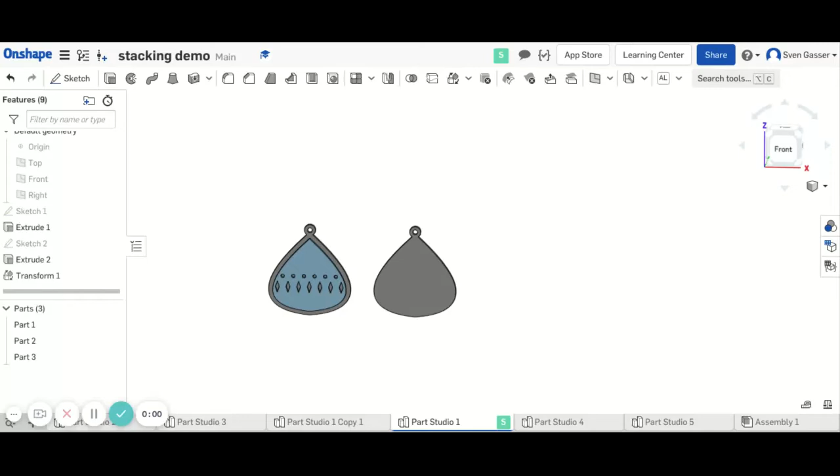Hello students, we are looking at how to make a repeating pattern like this. We're going to call it a linear pattern because it's in a line. So linear pattern is what we're going to look at here today to work on our ornament design.

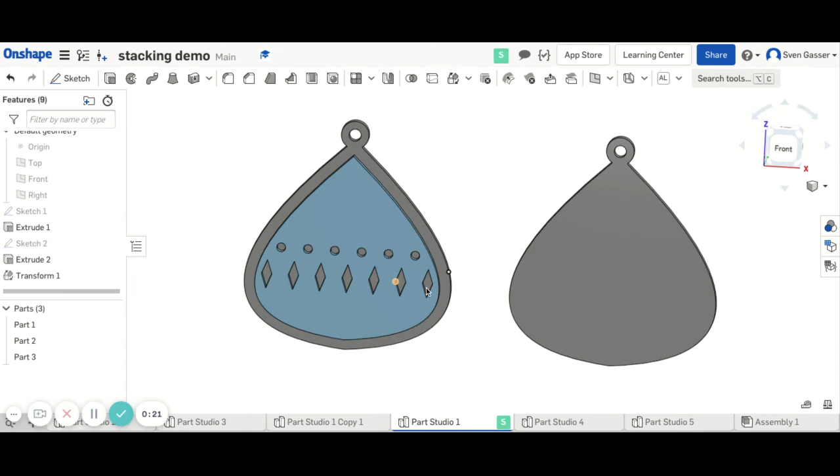This is assuming you already have a nice back piece to start your drawing on. We are going to try and make something similar to this one over on this second one here. Let's see if I can zoom in over there a little bit.

So we're going to start a new sketch, and we're going to say sketch on this surface right there. And then the first thing we're going to do is try to get this line that's a little bit smaller, but the same exact shape.

So we're going to find this tool called offset, and this creates a parallel line that is a certain distance away. If I click on that, you can see that it's going to make you go outwards if you want it to be larger. I kind of want mine to be smaller, going inwards like so. You can play with this little arrow. Sometimes if you get too small, it gives you an error message, so play around with that and see what works for you.

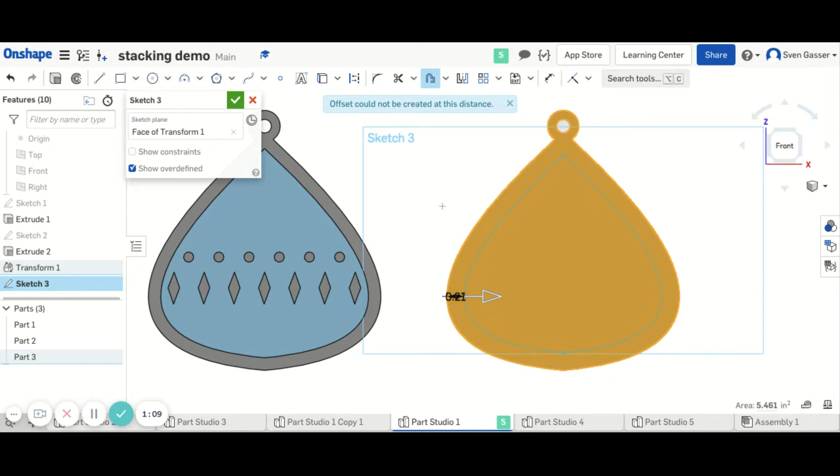That looks good to me. There we go. And you can always come back and adjust this number later if you want by typing something else in there.

So let's go ahead and put a nice shape in there. I'm going to do a little circle like so, and I want this one to repeat. This circle is going to be like this one here, and this can be any shape. It does not have to be a circle. It could be a little Santa Claus face or a candle or whatever you want, reindeer.

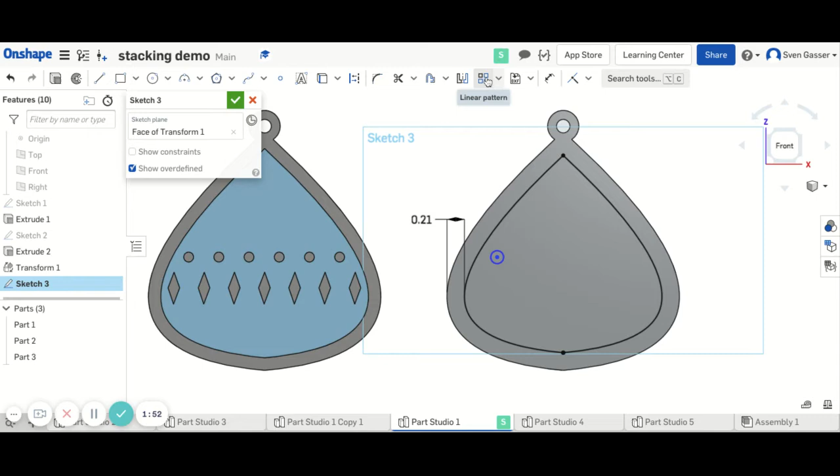So we're going to find this one that's called linear pattern. You click on that, and then we click on the part we want to repeat, and you'll see it starts showing us this here, right? So you can play with these arrows, and you can play with the distance between them.

I actually want maybe 6 or 7 or whatever number I want. Well, let's try 8, and those are pretty far apart. You can play around with these and get them to look pretty good there. Oh, I like the look of that. That looks pretty good, I think. Maybe a tiny bit less.

If you want to be really precise with this and make it exact, you might want to only pattern the left side and then reflect this over to the right side so that it's exactly the same. This one up here is if you want to pattern it vertically and make that repeat upwards at the same time. You can see that's not really what I want right now, so you can just leave that one alone, but it's there if you do want to use it.

I'm going to call that good, so I'm going to click off to the side here and push enter. Then click off to the side again, and sometimes you've got to push that a couple times. But you can see there, I did it. Doesn't look great, but play around with those numbers, and you can adjust that still and find out what's going to work well for you.

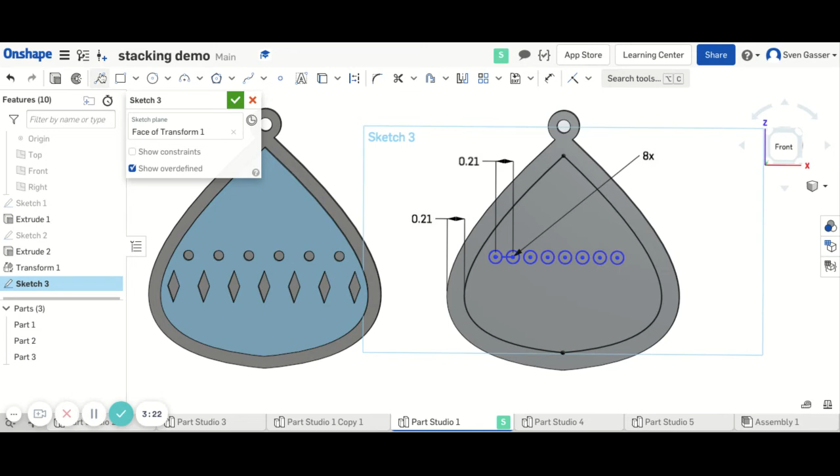All right, and if you want the second one, the second row of some other piece, you can zoom in here. And if you want that to be exactly centered off the other ones, you can come straight down there. I'm just going to make a nice little construction line out of the center so that I can mirror this, like we were just talking about a second ago.

I'm mirroring over this line so that I get a nice symmetrical shape there. I'm done mirroring, and now this shape is perfectly lined up with this center point.

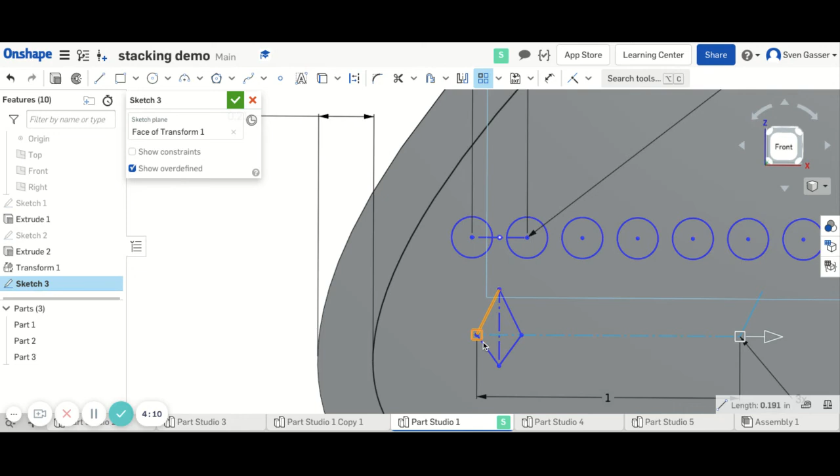And now when I pattern this and do a linear pattern again, I'm going to click on these pieces. I don't really need that center piece, so I'm not going to click on that. And I want to have the same number as before, or actually, maybe I want one less. I'm going to do 7 instead.

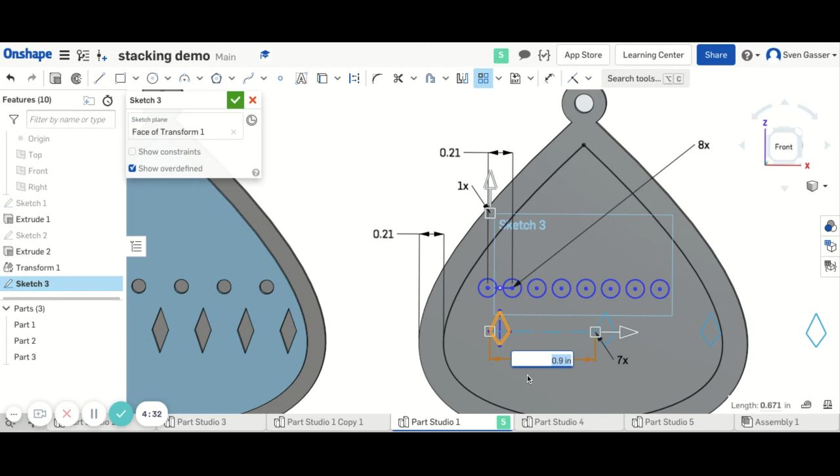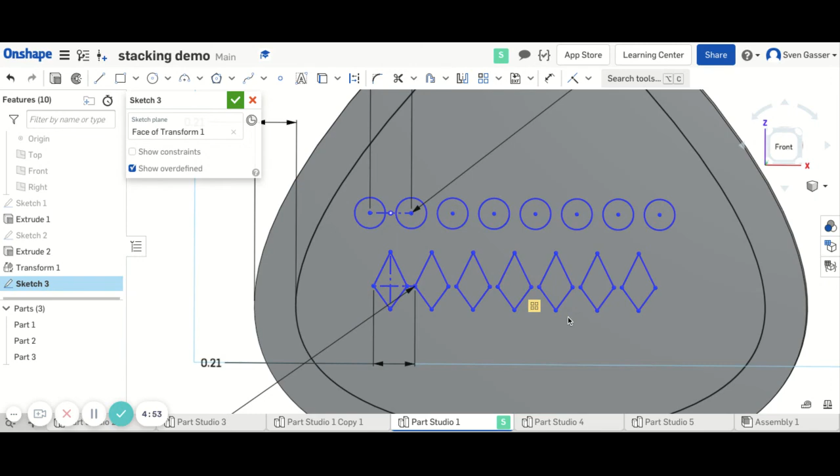And I'm going to make this number the same as this number, so 0.21 in my case. It can be something different for yours, and that's going to make them repeat. It gets kind of messy here with all these numbers, but you can see that's now repeating, and they're exactly lined up with the center there. Obviously that does not look as good as my first one, but I'm doing this purposefully a little off so that you get to play with this and find out what looks good for you.

So again, that's called linear pattern. It's a fun way to make repeating objects in a line like you see there. Hope this helps you with your design. Enjoy. Let me know if you have any questions. I'll see you in...